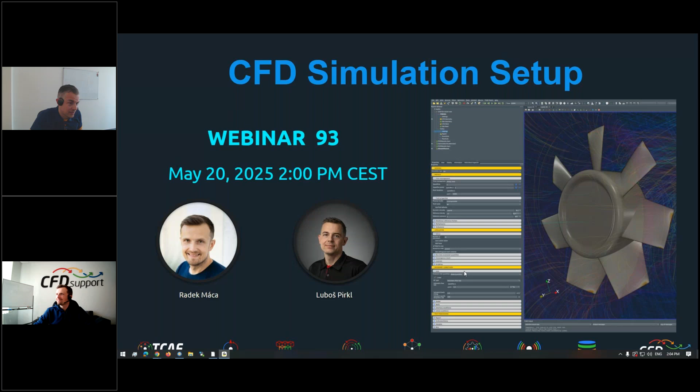In the next 5 minutes, I will mention all the necessary information about what's on the table. If I'll be longer than 5 minutes, I will buy you a beer when we meet personally next time, so I'll be careful to be shorter than 5 minutes.

Then we will start with general thoughts about how the simulations should be done, could be done, and we'll go into more and more particular details in the webinar - what we think about how to set up simulations, what are the smart tips and tricks, and special how-tos.

And then we will go more into goals, principles, and thinking of engineering simulations. And then we have two cases.

In the first case, it will be rather general, a very simple pipe flow. I'll show very quickly some principles about how to set up the case, but very simple. In the larger case, Radek will show a more detailed example of how to set up, specifically how to create the mesh, because it's always very important to create the mesh, and how to set up the critical settings of a Kaplan turbine.

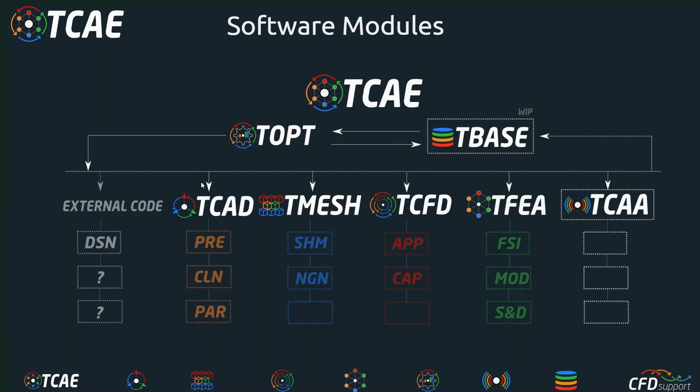TCAE is extremely flexible. It's ready to be used in an existing environment or for new users, so there are many usability options. TCAE is unlimited - there are no limitations on number of users or job cores, so you can be sure users will use their resources to the fullest.

It's based on open source - there are more than 60 open source projects included in TCAE, and we are ready to make available what's on the open source market to professional users in industry. So it's our main business and main added value. On top of the open source packages available in the market, we have invested more than 50 man-years of consistent development to deliver TCAE. So I guess the value of TCAE is obvious.

TCAE is accurate. It can be used as a black box, or it can be used as a highly sophisticated, high-end software where the user takes all the decisions step by step. So it's always up to the user how deep to go into the rabbit hole, or not at all.

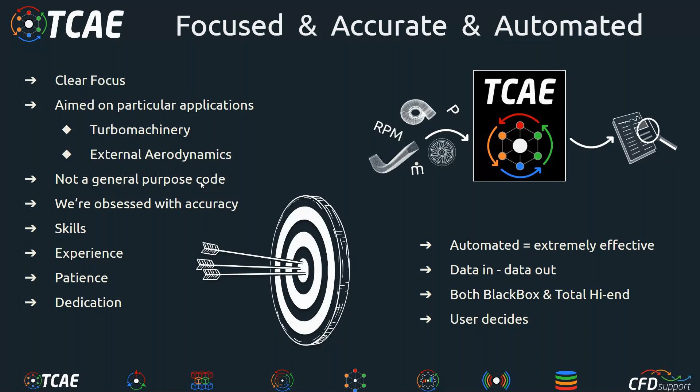There are various options and ways how to use TCAE. It can be used on laptop, personal computer, cluster, cloud, or remotely from home, in Windows, in Linux, in batch mode, or in graphical interface. So there's really a wide range of possible usage.

We have available 15 benchmarks which are publicly available and can be used again and again transparently. There are more than 50 real tutorials based on real projects from our consultancy business, and we have really good technical support. The new release has been released some time ago.

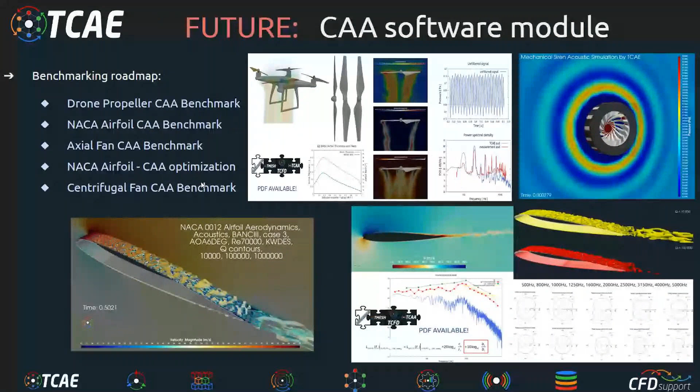The cornerstones of the future development are the optimization tool, the acoustic solver, and the new simulation module we are working very intensively on at the moment, called TBASE, which will help users create their own surrogate models and work with their data.

Yes, and this will be it. I was very much concerned to be in those 5 minutes which I just made. So I will start with the content.

I would like to recommend to every user, with every engineering project, to start with goals. Really, it sounds like a cliche, which everyone says, but everyone knows that, of course. But I really recommend to sit down, grab a coffee, and think about what are your goals.

Goals are extremely important everywhere, in society and in life, and especially in engineering simulations. You have to know your goals because you have to know where you are going. Unless, you will never get there.

So, goals. You should think about what's your project nature, where it comes from, where you want to go with it. If your project is disposable, one-off, or whether you are creating a workflow, a long-term process. That's extremely important. You should know what are your expectations, what you expect, where your project takes you.

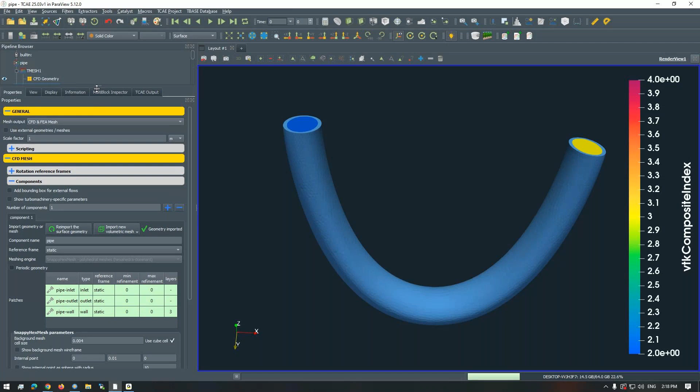I only have a general case, which is a standard, simplest possible tutorial for TCAE - a curved pipe where the flow flows through. This shows that simulation-ready geometry is something like this. I'll hide the FEA and FSI parts since we do not need them here.

In this example, almost every engineering CFD simulation project has some combination of walls - a rigid wall where the fluid flows, similar for external aerodynamics, but here we're talking about internal aerodynamics. There are also interfaces, typically the inlet and the outlet. So you have inlet, outlet, and wall - this is what we call simulation-ready geometry, because it's one component - we call these components.

The volumes, or future volumes, we call components, and you can have many components connected with interfaces. This tutorial is rather simple, so I have only one component - a curved pipe with an inlet and an outlet. Technically it's an STL file, a surface file, exported from some engineering CAD system. This is what we call simulation-ready geometry.

It's important that the geometry is watertight, waterproof. That means there are no big holes, or preferably no holes at all, so the flow can stay in and we can prescribe the correct boundary conditions everywhere. That makes the simulation complete, and we can run it.

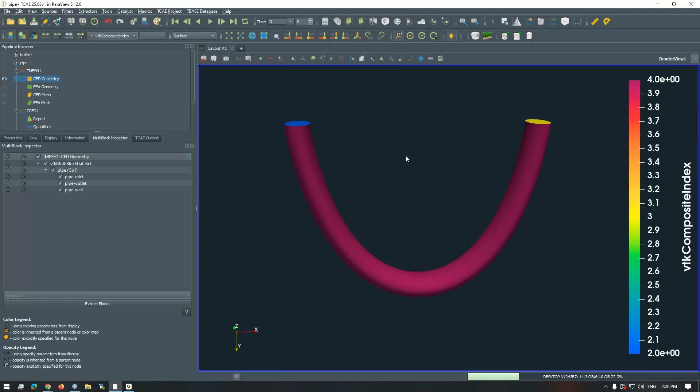So you have to have simulation-ready geometry, which was the topic of the last webinar. Then you need to start with the mesh - you have to have the mesh, and that's a process. You'll split your volume into little pieces called cells, which helps you run the simulation on it.

For such a case, we have a system of components here - in other software it would be similar. I have just one component called pipe, and I say it's static - nothing is rotating, nothing is moving here. It's a really static, solid component, and yes, it has one wall.

According to the STL surfaces, it has the outlet and the inlet. Let me take a look at what I have in the presentation - I have to create a full mesh for all components, yes.

For the mesh, I have to set a very important thing. If we use it - and we recommend it, but we never push it - we recommend the SnappyHexMesh, which is highly compatible with TCAE and OpenFOAM, and it's really useful. But again, we only recommend it, we never push it, so it's always up to the user whether they just load a ready-made, complete mesh and start computing directly on it.

TCAE is ready for that. Or, if you are creating the mesh, we suppose the simple, typical case that you create the mesh from scratch here.

So we have a component consisting of watertight STL surfaces, and these STL surfaces are used to mesh the volume with a background mesh. You specify how many times the background mesh is refined with respect to the surface, and how many boundary layers are considered in the case.

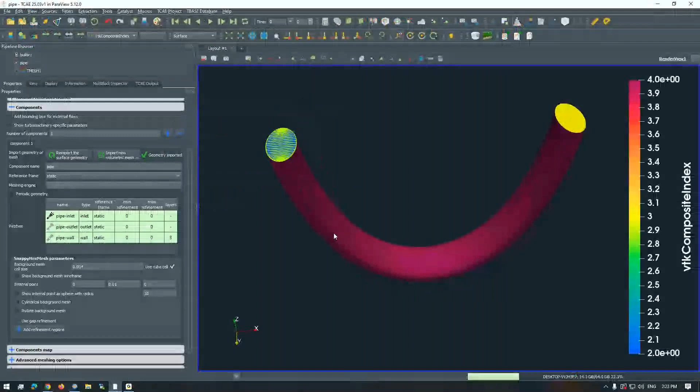You can say it here. This is just a basic principle. You can refine the mesh many times, and sometimes you need to specify a point located inside the component, which tells the mesh solver what's inside and what's outside. That's a general principle, and that's what we did in this pipe case. A couple of comments on that.

The mesh size is a super critical parameter and number. The size of the mesh, the number of cells it consists of, is extremely important. It influences the speed of convergence, the quality of results, and definitely concerns everything, especially the amount of data and the simulation time.

Simulation time is one of the bottlenecks. If you asked me, the biggest bottleneck in engineering simulations is getting simulation-ready geometry. The second biggest bottleneck is simulation time. Simulations take time - big simulations, transient simulations, multi-phase simulations, accurate simulations - they all take quite a lot of time. We have to get used to it, know what we're doing, and save every resource possible.

Let's take a look at what's next. I always recommend starting every project with small meshes. Play it small, do a lot of iterations in the beginning, because you can always refine the mesh later. It's simple to refine anything, but finer meshes take so much more time, effort, and resources. So go in iterations - every engineering project is typically an iterative process, because you always improve things. But start small, start with small meshes - it saves you tons of time and also gray hair.

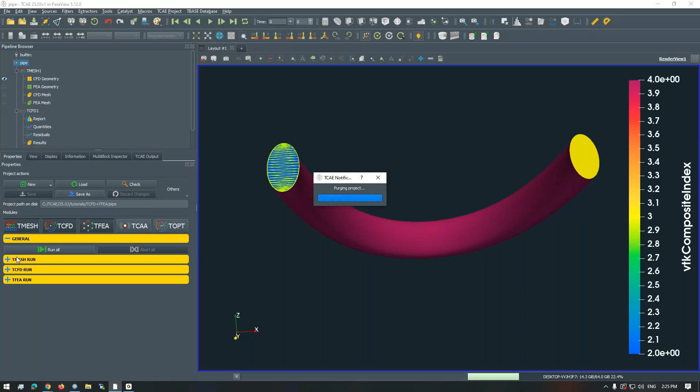Okay, that was just quickly on the mesh. I can say we have some settings here. I can completely remove everything from the case and ask the mesh solver to create the mesh. So it's going on here - it tells me yes, it's meshing now. The meshing process is running. It takes only a little while, so we can wait for it. When the mesh is created, I can visualize it with this button.

Let me check. Okay, I'll ask again - can you show me the mesh, please? And yes, it's here. So this is the mesh of my basic settings. We are already looking at the mesh created in the tmesh module, which ran all the necessary settings, wrote everything down, and ran blockMesh and snappyHexMesh on it.

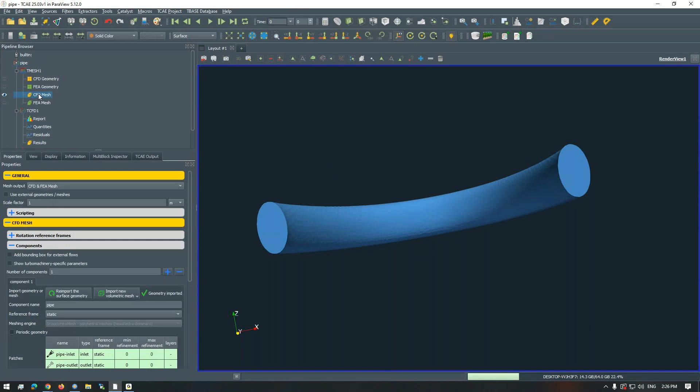I don't know why it's so slow today, but fair enough - so this is my mesh. This is already the volume mesh which will be the object of my simulation. It's quite rough, but I'm okay with it because it's relatively quick. So you have to have the mesh, and in today's webinar Radek will show much more about how to set it up, but I'll just mention a couple of principles here.

The mesh may look complicated, but it's not. Almost everything can be automated, almost everything can be reused - it's like a neural network, right? You can use the best things in the future because you remember them. It's the same with riding a bike - no one is the best when they ride a bike the first time, but next time and next time it gets better and better, and it gets quickly better the more you ride it.

Without knowing, you're actually getting better at it. It's the same with CFD simulations - there's always a huge chance you'll repeat the good, positive outcomes and tips and tricks. So what looks difficult is not, after some practice and experience.

Okay, I'll just quickly comment on simulation setup. I'll just quickly ask my colleague Radek if I'm still visible and you can see and follow.

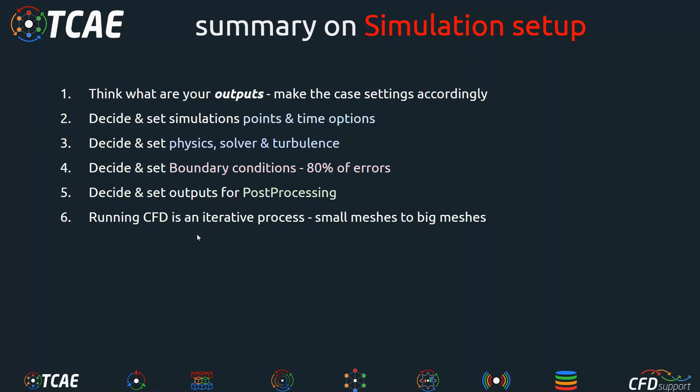So you typically run iterations here - iterations in running: run 1, run 2, run 155. Small meshes help you iterate quickly over your simulations and improve quickly.

You should always, during the simulation, follow the basic laws that conserve. So the flow rates should conserve, the residuals should ideally drop, and final results can be followed too.

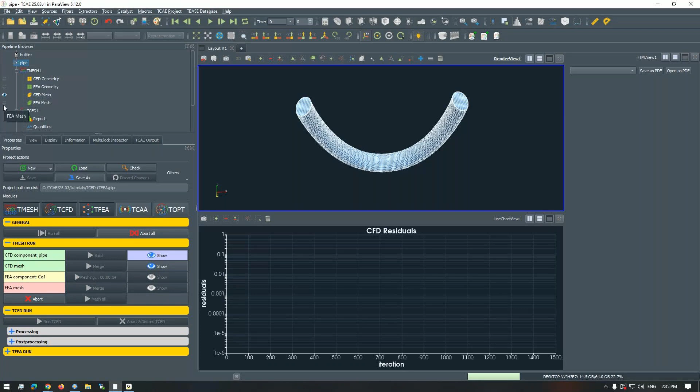We can maybe show it. So if I run the simulation, which is this CFD, I'll run everything because I'm not sure if there are several steps. So I have run all run processes. Now it's running, and I guess this case is a little special because it also has an FEA part. There's the outer part, which is a coating of the pipe, meshed with NetGen, and the forces are transformed to the surface, so we can compute the material stress and deformation. It's a little more complicated, but still I see something going on here.

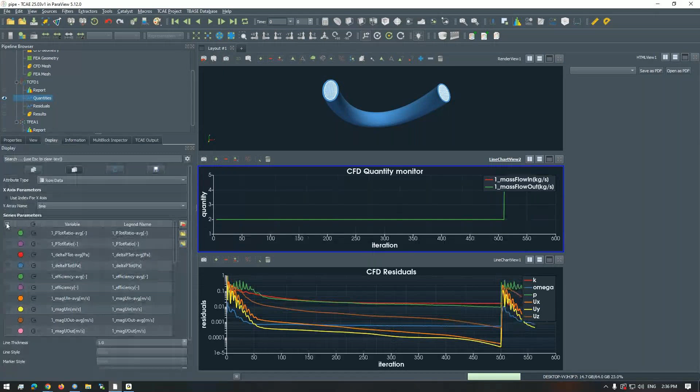Yes, so the case is finally running and iterating. We could show another window view. I could be interested, for example, in a line chart view, in some additional quantities processed during runtime, and we could take a look at, for example, how the pressure drop looks like. Okay, maybe why not? Yes, so this is okay. It's quite flat in this case, but we could zoom in a little bit.

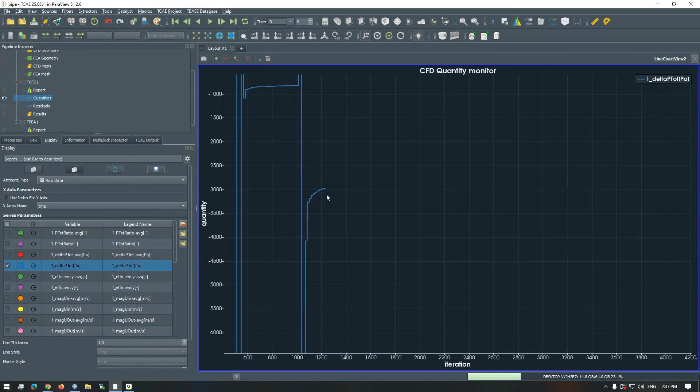And this is how the simulation — actually, the simulation is done already. Okay, so we have three points. No, the third point is going on here, let's catch it. I'm going for it. Yes, here you can see this is the delta P total, the difference in total pressure from the inlet to the outlet, and you see it's hopefully converging. It's a simple tutorial, so you can display things here. You can see three sets of residuals here.

So again, things may look complicated for the first time, but they are not. You should be patient and really learn along the way. And look what we have here.

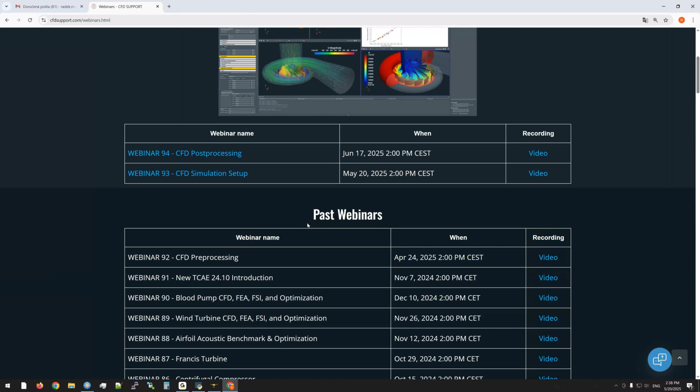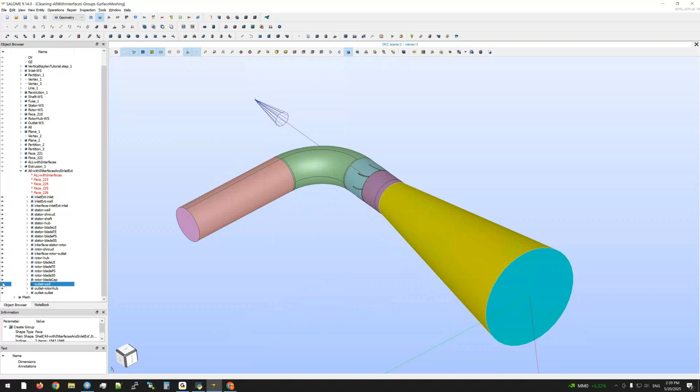So what we did, just a small recap. We took this small Kaplan turbine, the real solid shape of the housing, of the rotor, including all the solids, all the parts which are not necessary for CFD simulation. So what we did last time, we cleaned it. We got rid of all the solids and unnecessary parts, and extracted just the wet surface. Also we created the interfaces between rotor and stator, and between the extensions, for example. Then we exported, generated and triangulated the surfaces, and exported the STLs.

So today I will take these STLs. I have put them here into this directory, and these STLs will be used to import and create the simulation flow domain. Just to see the overview of all of them: basically we have a set of STLs exported, and what we do is use each set of STLs to create a set of components.

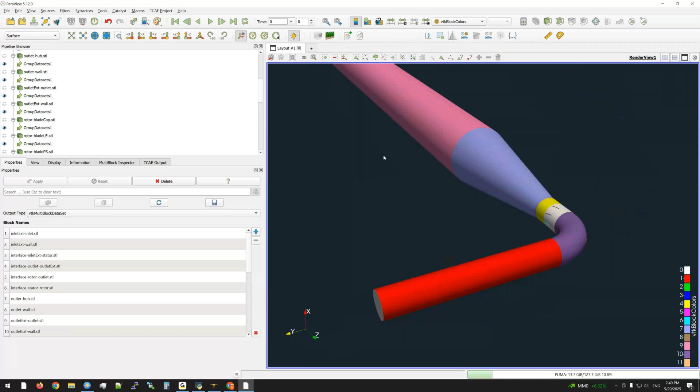So we will have more components to build our flow domain. In this example, I have also generated this huge or large extension, which is somehow useful to let the flow calm down and have proper conditions, for example based on the measurement or the setup. So for example, you just know the pressure at some points, and also with respect to evaluation purposes — you'd like to evaluate the efficiency starting from this elbow and ending on this outlet cone, etc. This will create additional components, and more components, more fun.

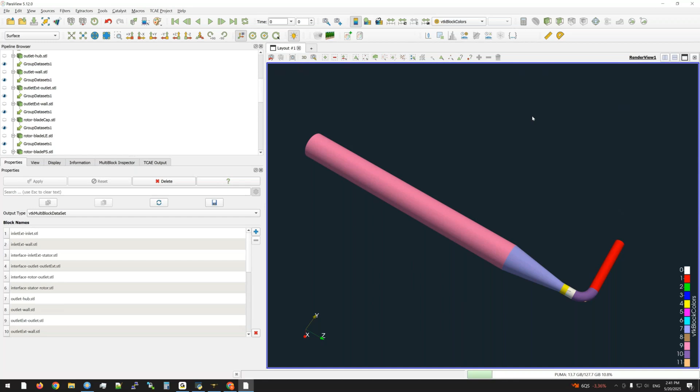So let me start creating the project. I will start from the very beginning, as if you are starting a new project from scratch. I will open TCAE and create a new project, clicking on new, create empty. I'll store the project in the folder we'll be working with today and name it TCAE webinar Kaplan. From now on, all my setups will be stored within this folder on my disk.

First of all, we need to start setting up the mesh. So let us follow Luboš's notes, or the items which he had presented.

Let's talk about the interface. What we have here is the main project manager, which holds all the managing buttons to work with and run the simulation, generate meshes, generate reports, etc. And here we can enable all the modules.

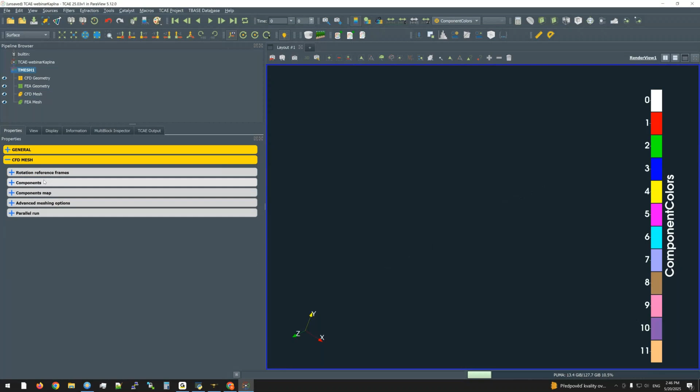Okay, so that's the rotation reference frames, and now we go to components. We will set things up component by component. Basically, each component is meshed separately, so we can treat any component as a separate mesh. We just need to focus on each component, mesh it, check if the mesh is correct, and then go for the next component.

Whenever we have all the components set, then we need to take care about the connections and the interfaces, and if all these are checked and generated, then we are done and can go for the CFD setup. So let's go component by component and start importing the STLs, beginning with the first component, which was the inlet extension.

Inlet extension is just the pipe. So we have inlet extension inlet, we have a wall, and we have one interface which will be connected to the stator. So we have these three parts. Ta-da! We have it here.

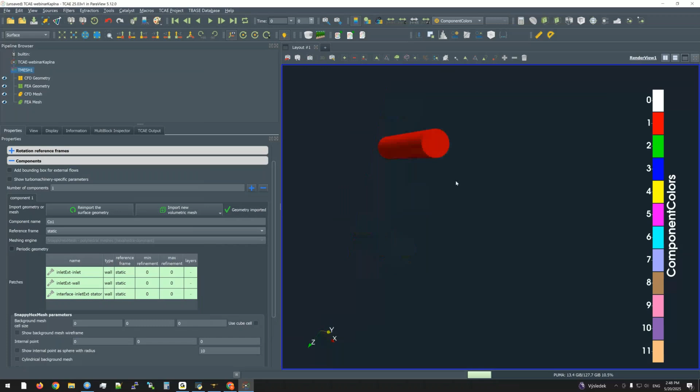Whenever you load these STLs, it will appear in this table, and also it will appear in the render view. Anytime you can click on any part to see which part we are setting up if we are not sure. And what is also good is to click here, because the CFD geometry is held by this item. It can be hidden, it can be shown.

And what I like is to set some kind of opacity, because if there are some objects inside, I would like to see what is happening inside. And also, for example, for setting up internal point, which defines part of the meshing, it's good to have the opacity to see if the point is put inside.

So for each component, what we can set, we can set a component name. It's up to the user. For example, I can name it as inlet extension. Reference frame, static. Periodic geometry is in case we have just a periodic segment.

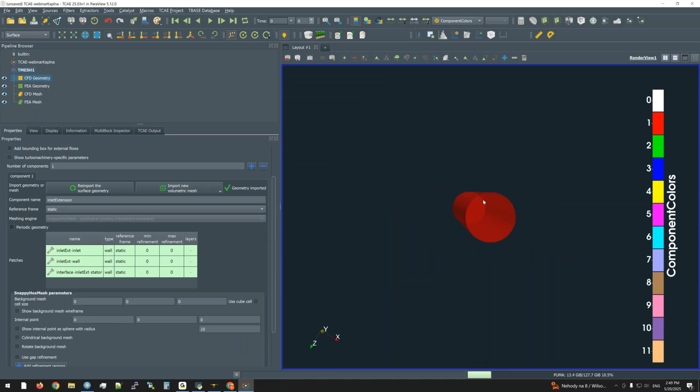So in some scenarios where we expect the symmetrical behavior of the flow, we can save some cells by cutting the axial domain like a cake. So we put just one part and set periodic boundary condition, for example. But in this case, we will have it as a full pipe.

So what we have here is the type of the boundaries. So inlet - we have a set of boundaries. I think for CFD engineering it's pretty clear: at least if you are doing internal flow, you have to have at least one inlet and one outlet from the domain. With respect to the component, it has to have some inlet and outlet.

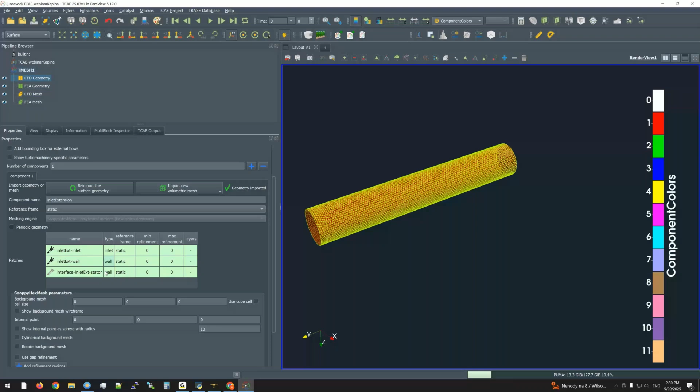So if the patch is connected to the neighboring component, we call it interface. If it's not, we call it inlet or outlet. So inlet extension is the inlet, wall is wall, which is the default type, and the interface from inlet to the stator will be the outlet interface.

The naming I think is natural: inlet denotes the part where the flow goes in, outlet is the part where the flow goes out, and free stream interface is where we don't know the direction of the flow, or there could be in general both directions - something like if you have the propeller behind the ship or vessel, and you need to put the propeller into the rotating cylinder, and the whole cylinder is the interface. So there can be both direction flow on this cylinder. For that scenario, we set the free stream interface.

But here we have the outlet interface, because this is just the extension to initialize the flow. We don't need to solve it too accurately. So for example, we can keep all the refinement surfaces to minimum, and what we need to set is the background mesh cell size - this is the largest cell which will be created.

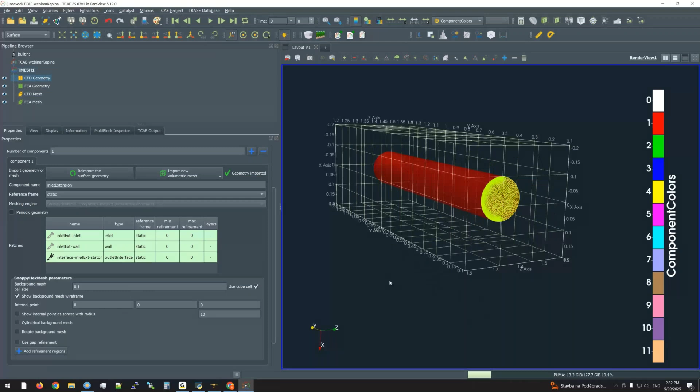I typically use cube cells, but for example, I can show you how to save some cells on these extensions. First of all, I'll do it this way. I think the diameter of the pipe is something like 16 centimeters. So if I set just 10 centimeters, it's too large, as you can see. So let me start with, for example, 1 centimeter. It could be fine.

Following one of the key points: always start with a rough mesh. Make the mesh as rough as possible, but the mesh refinement has to be set in a way that all the topological shapes and all the details are captured. Typically, if you do such a large meshing, I think it's not a good idea, because you will have just one cell or 2-3 cells - it may not even be possible to mesh. But to a certain level, it must be accurate and well resolved.

So let's start with 1 centimeter. For example, if you would like to save some cells on this part because it's not so important, you can uncheck the cube, and now you can set the dimensions of the basic cell size in any direction. Let's start, for example, in - I think this is the y direction, right? So we can make it double in this direction to save some cells.

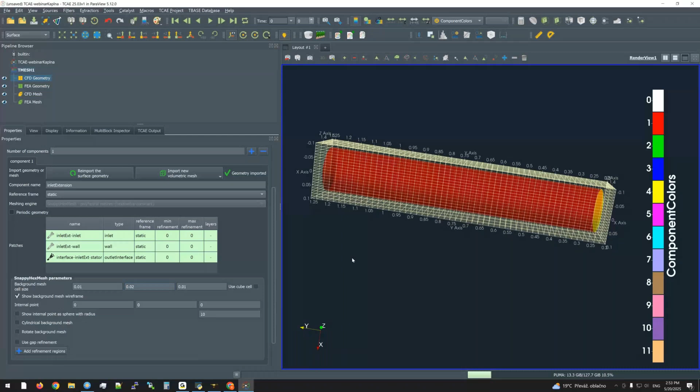Okay, and the last important parameter to set is the internal point. So internal point is visualized by a point.

It's interactive, so you can take it and push it into the internal part of your component, or you can define it manually. Let's say I will adjust this radius just for visualization purposes, so it will visualize this sphere, which is nicely draggable, and we can push it into our domain, or you can put it manually if you know the coordinates or dimensions of your components.

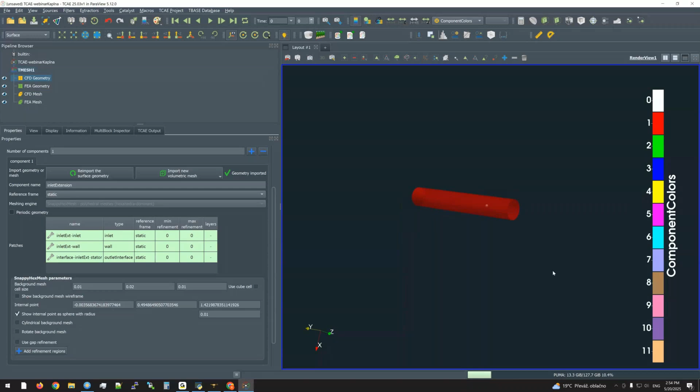Okay, so I will get rid of visualization of this outlet interface. I think I am done here, so I'm okay with that. I can hide the internal point just so I don't accidentally move it outside. Now, for example, if you have the first component set, you can save the current setup.

And just quickly you can build a mesh. Now, if you see it, there is some trouble with my setup, so I can click here, check, and I think it will tell me that I have the outlet interface which is not connected to any other component. So if I need to mesh it from now on, I can set it as outlet, go back, save my current setup, and now I can build the mesh.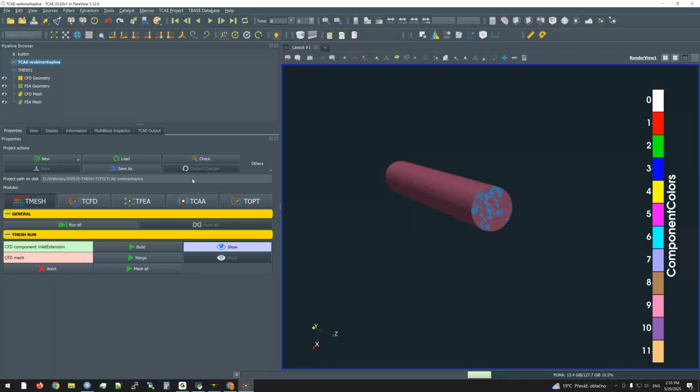If you click here on the tab TCAE output, you will see what is happening. Now, the mesh generation is pretty quick because there is almost nothing to do, just create a background mesh and make the snapping. So if I show the mesh, as Lubos already shown us, surface with edges, we can see the basic mesh refinement. It's pretty rough, but the mesh is okay for the simulation point of view.

From the accuracy point of view, of course, it's not optimal, but for the first check if my simulation will be set up properly, and if I get at least some results, it's enough. Also for the webinar purposes, because I need to run the simulation quickly within the webinar. It would be pretty boring to wait, for example, 1 hour for the results.

Okay, so this was the first component, and in a similar way we are going to the next component, which will be more interesting. So let's visualize back the CFD input geometry. I will get rid of the mesh, and let's import the parts for the stator. So let's take all the stator parts and the interfaces.

So the interface from the inlet extension is this one, and the next neighboring component is the rotor. So let's pick this interface, stator-rotor STL. All right, perfect. So a new set of STLs for the second component is loaded, and now we can do the same framework.

So set all the parameters, I can name it stator. Reference frame is still static. I don't need any periodic geometry because it's a full geometry. And let's go for the types.

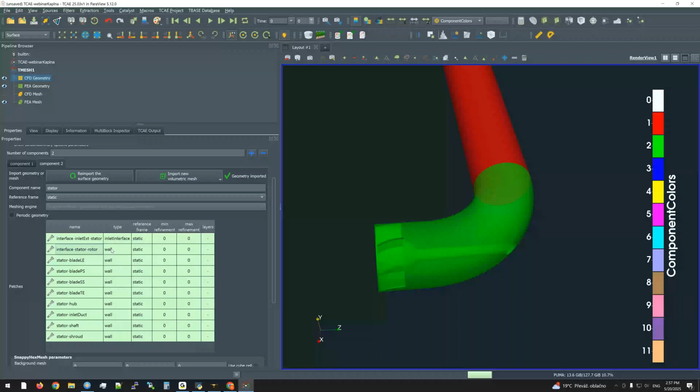So to be able to mesh it, before I add additional components, I will set it as outlet. The other, I can keep it as a wall, for sake of simplicity I will keep it as a wall. Stator hub, everything is wall, and so the rest are the walls, rigid walls.

Reference frame here, let's check. So this shaft which goes through the stator, the stator is, I think, adjusted to the casing by the blades, and the shaft goes through the inner part of the stator to the rotor. So this shaft part, which is physically rotating, I can prescribe the rotating part outside the rotating component. This can be done for all rotational symmetry parts, walls, or patches.

So in this way we have just this shaft, so we can prescribe rotation on this shaft within the stationary component. Now let's go for the refinement. First, before I go for the refinement levels, let's set the background mesh cell size. Again, I will put 1 centimeter, which was fine for the previous component. Now I keep it as a cube shape.

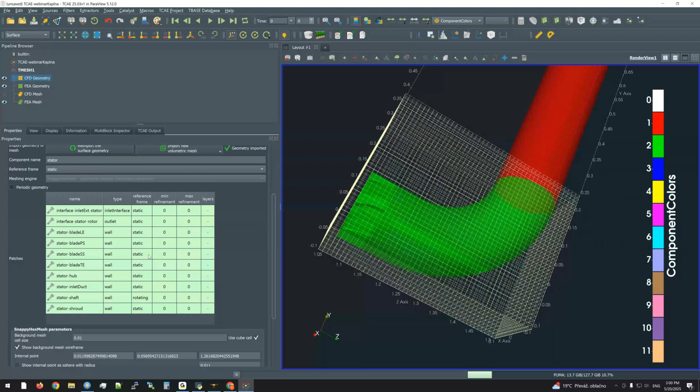Perfect, now let's set up the refinement. The refinement means, if I visualize the background mesh cell size, every cell intersected by one of these STLs will be refined up to the level we preset here. So let's go for it.

Okay, then what we can refine, for example, all the other parts. So let's set everything to level 2. And maybe this inlet duct we can also keep, for example, set to level 1.

Then what we have there, blade pressure suction side, let's see what will happen if we keep it at level 2. And for example, blade leading edge, which are these small parts of the blade that are highly curved, for those parts we can set a higher level of refinement. Because they are small, we can keep the level the same for minimum and maximum.

The minimum and maximum refinement level, if we set different values, for example 3 and 5, the algorithm decides what level to put at different parts of these STLs based on the local curvature. But in this case, because this part is curved as a whole, we can set the same level of refinement for the whole part.

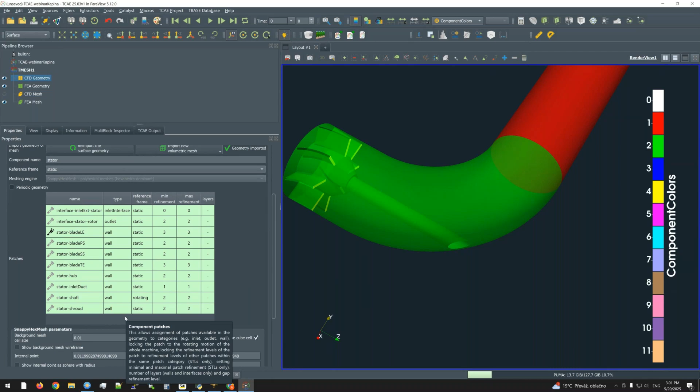All right, I think we can keep it this way, and let's try what will happen if we start meshing it and how the mesh will look like. So again, I can go back to the manager, click save to be sure everything is correctly set, and we can click check.

So project setup content again, interface. Yeah, perfect, so I have created the interfaces but haven't connected them yet. The connection is done by right button click on the given interface patch, and the menu will appear giving you a set of possible connections. We have only one possible connection now, to connect to the stator interface.

So now it is connected, and the connection can also be checked here. If you go a little bit further in this menu and scroll down, and extend this components map, it will tell you how each component is connected to the others. So now we have a nice solid connection from the inlet extension to the stator.

All right, so now again save my setup to be sure. I will check project setup is okay, and because I've changed the type of the boundary to the interface, the first component has to be remeshed too. But we are fine because we haven't changed any meshing parameters.

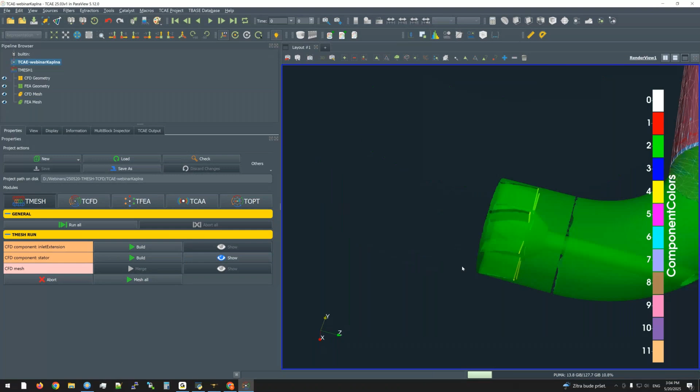Okay, and something was wrong. As you can see, the mesh leaked out, so probably I forgot to include some part of the setup. So what did I do? Okay, I have all the parts, I hope: this is the shroud, this is the shaft, inlet duct is okay, stator hub is also there, stator blade, blade suction, pressure side, leading edge, interface rotor stator. All right, so now I'm not sure what happened.

So the internal point is still inside, which is okay. The refinement was also fine. So, okay, to be honest, I'm not sure what happened.

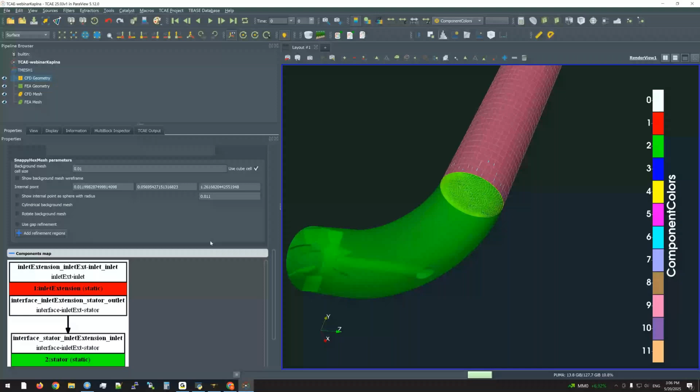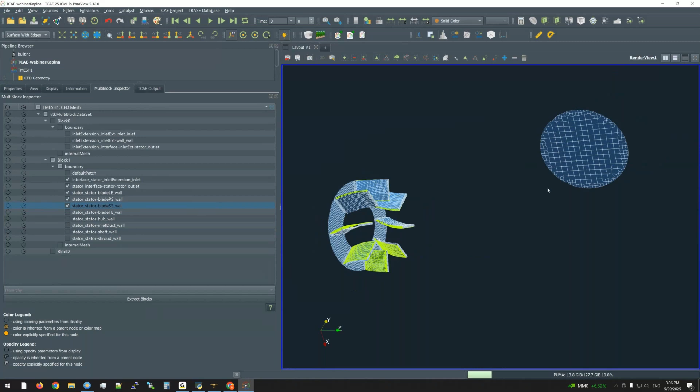So typically, what does it mean if you see such a leakage? If you visualize the mesh again, it means the mesh was meshed from both sides. So if I go to the multi-block and pick the boundary, you can visualize each part of the mesh. We have it there, but also this default patch, which indicates that the mesh leaked out from our domain. That means the domain is not closed fully.

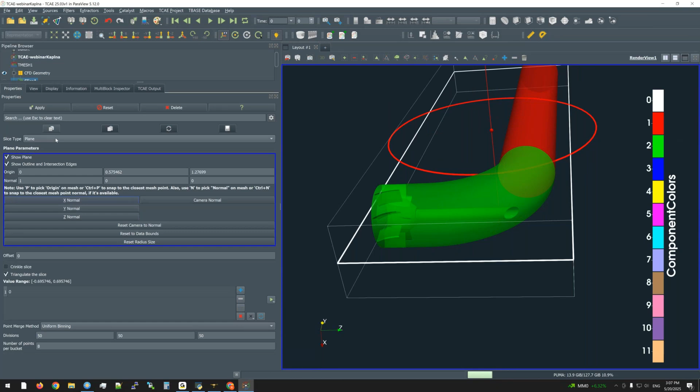What I can do is visualize my input geometry and, for example, do a slice if I have an enclosed contour. So let me make an X slice - apply, get rid of the CFD. Okay, so I think everything is closed, right? If I get rid of the first one... okay, it seems fine.

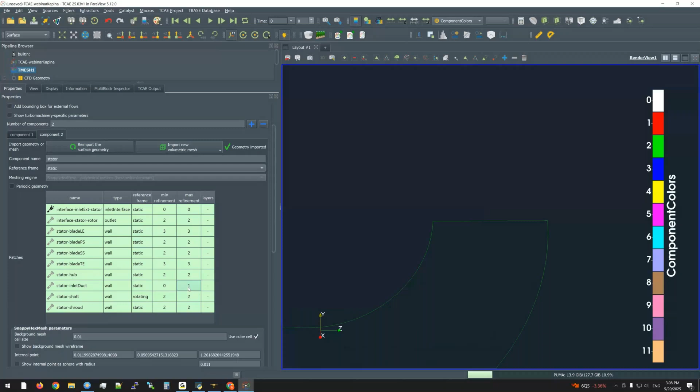Maybe I don't know if the export was okay - interface rotor to stator inlet duct, or maybe the mesh. Let me make it a little rough, because I'm not sure if I took a proper STL. If you can see, I have some troubles here - we have some local holes in there. So maybe I took a wrong STL, but let's try to fix it by making the mesh rougher.

Just as an example, let's regenerate the mesh with a slightly rough setup. The main point is that I should go back to the STL generation and check what happened here - why these holes appear at this surface part. Let's check if the mesh will be better now, and if not, maybe there's another option to heal it implicitly, but let's wait for the result.

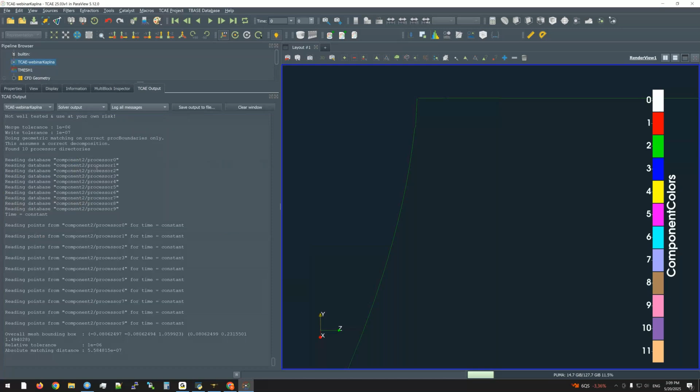Okay, and now it's meshed properly. So there was some trouble. Let's go back to the multi-block inspector - no sorry, CFD mesh - and visualize the whole mesh. Okay, so now it is correct. So I had some troubles on the input STL.

So definitely when I go for refinement, I should recheck the input STL and heal the errors in it. This was an example of how to tackle errors in the input geometry, which again emphasizes what Luboš mentioned - that the crucial part is to have simulation-ready STLs as the inputs. This was a nice, unexpected example of bad STL meshing quality.

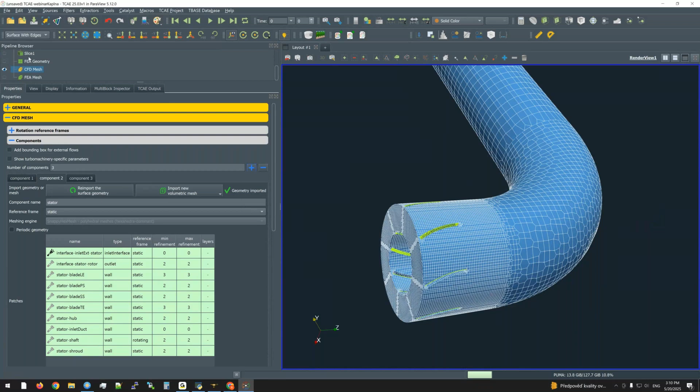And I will quickly go for the other components in this example. Let's go for the rotor - again I will import the rotor STLs, the interface of the rotors and STLs of the rotor. Let's import them. For now I will get rid of the CFD mesh and show the CFD geometry. So now we have this part.

What I can do is set the component name as rotor. Let's go for the interfaces - this is the rotor outlet, so I will set it for now as the outlet. Here I will set it as inlet interface for the stator, because I can directly connect it to the interface from the rotor side. Right click, connection to the stator - and now we have three nicely connected components.

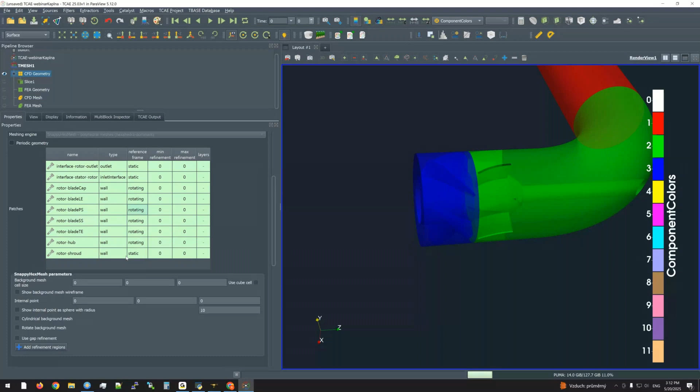I will keep all as walls, and for the reference frame I need to care mainly about the wall boundaries. All the walls here, like the hub excluding the shroud, will be rotating - all the parts which create the impeller should be rotating, but the shroud is static. So it's a so-called unshrouded case - the shroud is not rotating, only the impeller and blades of the rotor are rotating.

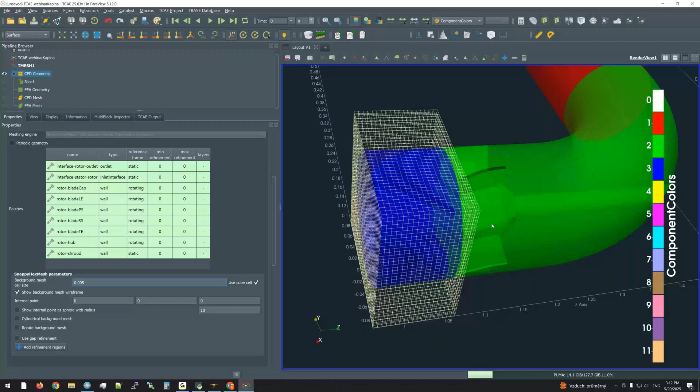Before I go for the refinement levels, I will again set up the cell size for the background mesh. For example, because the rotor part is the most important part and the main flow patterns happen there, I can set a finer refinement or finer cells at this level to have finer cells in the volume, not only on the surfaces. In the same way, I need to set the internal point.

Let's put it inside. If you're placing it manually, you need to change the views to adjust the point inside the rotor part. Just check that the point isn't, for example, in the hub or in the blade. But I think now it's pretty much okay, here between in the flow, in the blade passage. Okay, so it's placed properly.

Go back for the refinement level. What I like is that the mesh refinement on neighboring interfaces is homogeneous, or has the same sizing of the cells. It makes sense because the quantities are interpolated internally on these pairs of interfaces, so it makes sense to have the same refinement from both sides.

So on this rotor-stator interface, for the stator part we have level 2 and 2. And because we have refined the overall cell size twice here, we set half of a cell size on the stator side. So I can just set level 1, because it will be comparable - it will have a comparable size from the rotor side on the interface to the cells on the interface from the stator side.

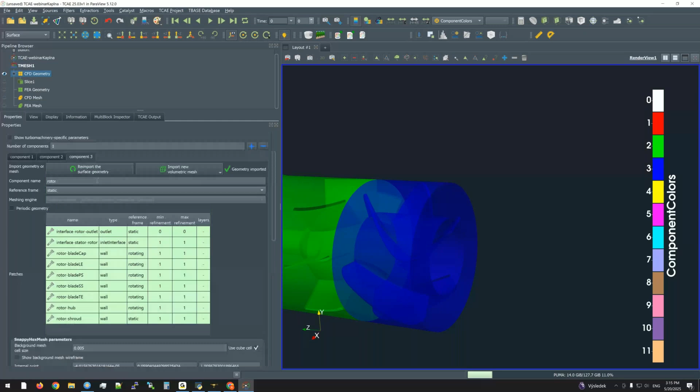Just as an example, to see if this refinement will be sufficient to mesh the rotor section. I hope I set everything - no, I haven't. I forgot to set the reference frame for the whole component, which is important for the rotating part. So I'm setting it as rotating. Now let's click save.

Let's try to run the rotor side meshing, and whenever it's done, let's visualize it. I think we'll see that the mesh will not follow all the detailed parts. This is crucial when you're starting - whenever you generate the mesh, immediately visualize it, because it will tell you a lot about the meshing.

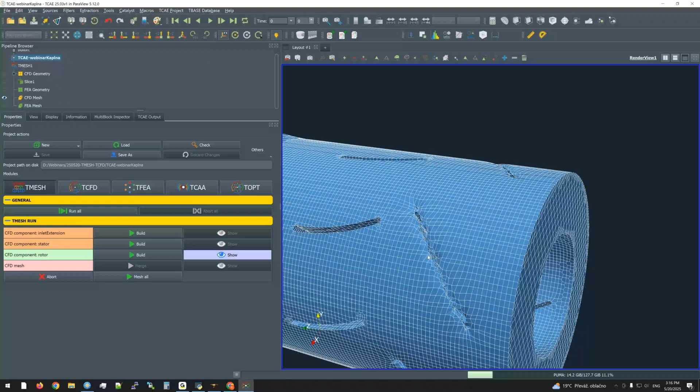As you can see, there is bad refinement level for meshing this gap between the rotor and the stator and the shroud. For example, to see the overall meshing for the blades, you can click on the CFD mesh. I'll get rid of all parts and show just the parts of the rotor - for example, blades and the hub.

You can see both that the leading and trailing edges are not well resolved, and the main problem is that the gap between the blade and the shroud is also not well resolved. You can see such flaws in the mesh, which generate very bad cell parameters that can, during the simulation, lead to divergence or crash of the solver.

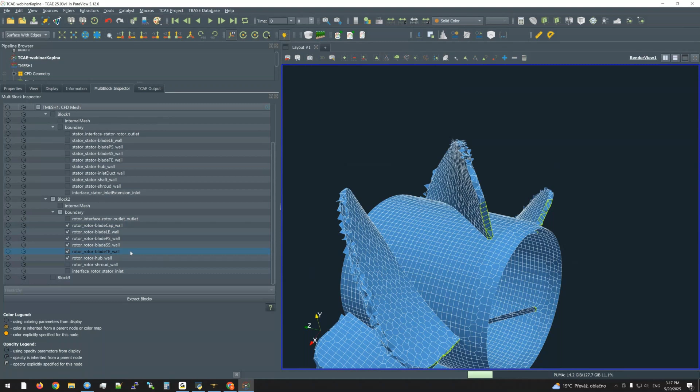So we need to go back and refine the given part. Let's say I will just refine the leading and trailing edge - I will increase the level of refinement on the blade leading edge and the blade trailing edge.

Therefore, if it's possible during the STL generation, it's good to split these parts into separate parts. If possible, it's not crucial, but it will help you and give you more freedom in setting the refinement locally. Otherwise, if you have one STL for the whole blade, you need to set the levels like 1 as a minimum and 2 or 3 as a maximum, and then the meshing engine will decide where to put the lowest or highest level of refinement. All right, and the last one is the blade cap.

We have also splitting of the blade cap, so now we can set level 2 for meshing the blade cap. Going back, clicking on save, and regenerating the rotor mesh.

All right, so this is the standard scenario of mesh generation for new geometry for your new project. Go step by step - let's start with rough parameters, low level refinement, high sizing of the cells, because you'll get the mesh quickly. You'll be confident, and you'll learn the shape of your input geometry. It will show you where the problem could be during the meshing.

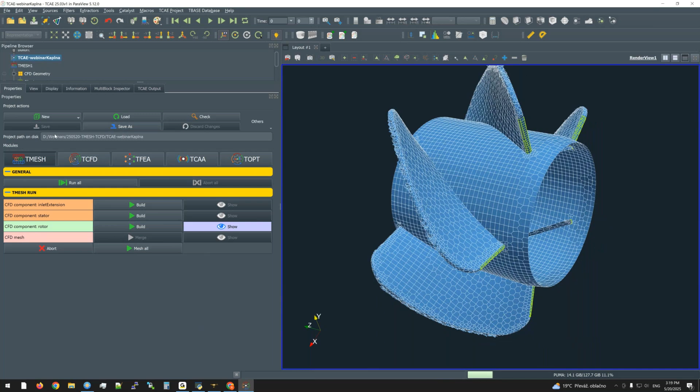So if I click on the CFD mesh, I will also visualize the shroud. Still we can see that there are big flaws and bad cell regions in the gap between the blade and shroud. So for now I will just increase the level of refinement for the blade cap, and I hope finally we'll have a good mesh which we can use for the simulation.

So let's run our last iteration, and if the mesh is okay, then we can add the last component and we are ready to go for the CFD part.

As you can see, you need to iterate, you need to go step by step. What is good is that this component thinking will give you a focus on a certain part, and you don't need to take care about everything within one shot, but you can go step by step over each component.

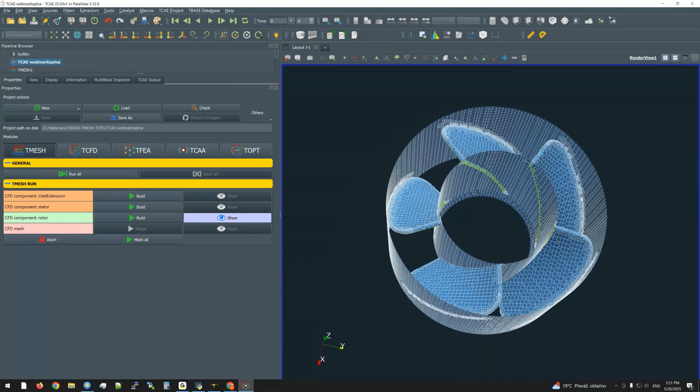As you can see, if you click on this icon, it will reset the view and also reset the view rotation point. So sometimes it's good to re-click this reset view button.

Now you can see there are no holes in the shroud. The better visualization is if you get rid of the surface with edges and visualize just the surface, and now you can see a nice smooth shroud without any problem. I think the rotor part is fine.

Last but not least, maybe just to speed up, I will add the outflow, and I will not be adding the outlet extension. So let's go back to the T-mesh.

Let's go here, and I will add the last component, which will be the outflow. Import, and let's go for the outlet. So outlet hub, outlet wall, and interfaces: interface rotor to outlet, and the last one will be the interface outlet to outlet extension, but I will set it as a final outlet.

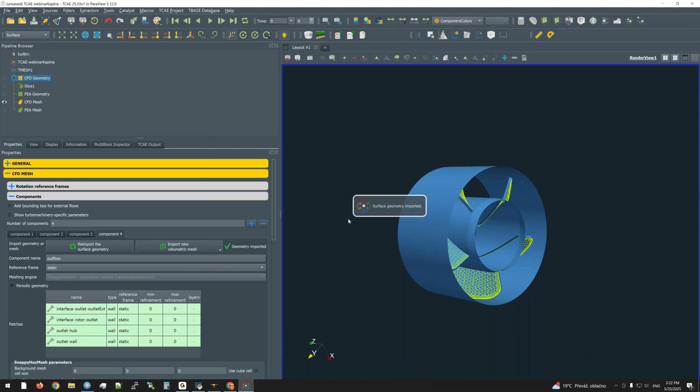This will be pretty quick. You can see the extension just includes the interface, the hub part of the rotor, and the outlet wall. So this part is static. Interface outlet to outlet extension will be the physical outlet.

I will go back to component 4. The outlet I will redefine to outlet interface. Rotor outlet is the inlet interface. Immediately I will connect it to the rotor, and hub and wall are the walls, but the hub is connected to the rotating impeller, so I will set it as rotating.

The background cell size I will set back to, for example, 1 centimeter, and I will refine just the hub. I will refine the inlet interface to the same level as on the rotor side, including also the different sizing, of course. For the outlet wall, I can keep it.

I will set 0 just for speeding up the simulation. I think it will be okay, and the outlet will also not be refined, so it will have the dimensions of the background mesh cell size.

The last thing I need to put is the internal point. It is directly at the outlet, so I need to move it a little bit inside. Nice, and I hope everything is set, so let me check.

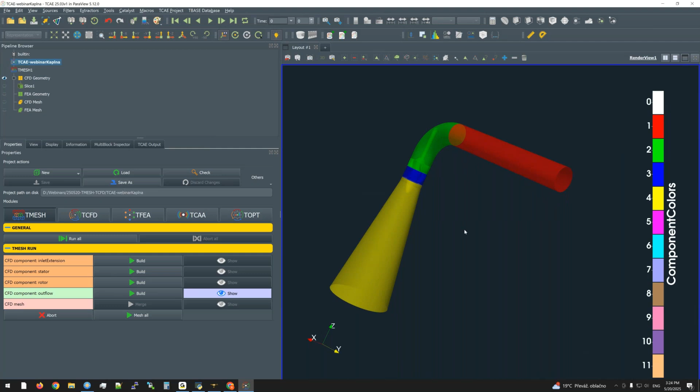And okay, the CFD mesh is... yeah, it was here. Sorry, what have I clicked. Okay, maybe I need to go to the multi-block. Sorry, because I have been clicking a lot here.

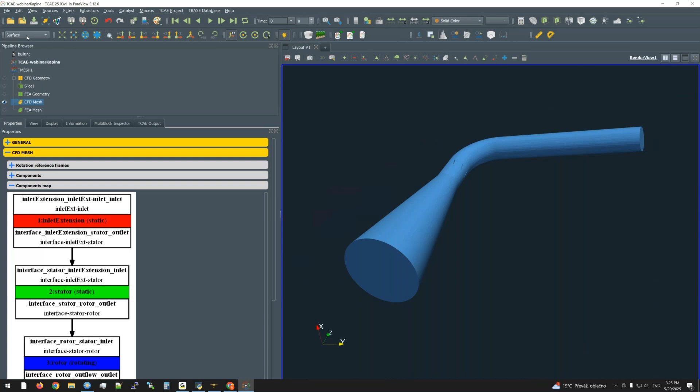Yes, of course, and I will click on everything just to see all the parts, all the visualized parts. Okay, now I visualized already all the parts generated, and when I visualize it as a surface with edges, nice, so we can see it looks good.

There are no flaws in the mesh. Just to be sure, I can make a slice to see what is happening inside, just to see also the volume inside on the slice. Again, surface with edges.

So here we have our topology. What is important is that all the important parts are meshed properly, so each has its own shape, and we don't see any troubles, any holes in the geometry. Here we can see that also the gap is refined, so we have some volume there.

So this is a good setup for the first CFD simulation run, and whenever everything is running, then we can start refining the mesh and looking at how the results change, to obtain results with better accuracy from the mesh parameters point of view.

All right, so everything we have done - meanwhile I will remesh everything to have the final mesh, which is then imported in the background into the CFD section and used for the CFD simulation.

So this was the meshing, and now I can enable the CFD setup and quickly go through it. The CFD setup is much simpler to set up from the time frame point of view, because we just set the parameters of the fluid and the boundary conditions, so we don't need to iterate and wait for the mesh generation. So let's go for the CFD setup.

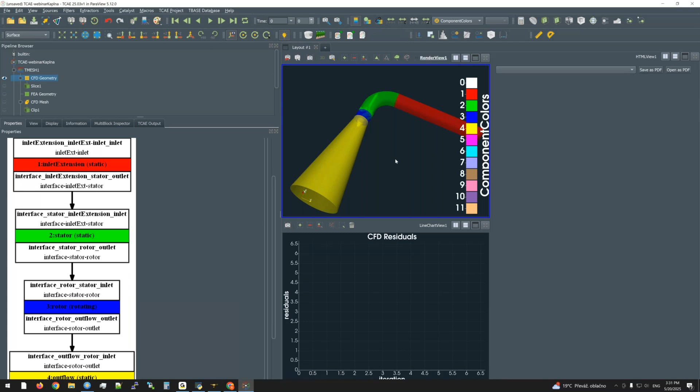A typical mistake is the direction of rotation - it follows the right-hand rule. So if my thumb points along the z-axis, my curled fingers define the rotation direction. As you can see also from the blade definition on the rotor, this is how the impeller rotates, so therefore it's a positive value for the rotation. The positive value is okay.

Within the multiphysics, you can define some additional physics to be included into the simulation. So here, typically for pump and hydro turbine applications, we can ask for evaluation of the cavitation risk.

It's just a post-processing tool which evaluates the pressure and compares it to the saturated vapor pressure value. If the pressure is below this threshold, the saturated vapor pressure, then it denotes these cells and creates statistics on these measurements, and what parameters should be set.

Cavitating patches means these patches will be used to evaluate what proportion of the surface on these patches is affected by cavitation. Typically I would like to include all of them, maybe excluding just the shaft, so I need all of them included in the statistics.

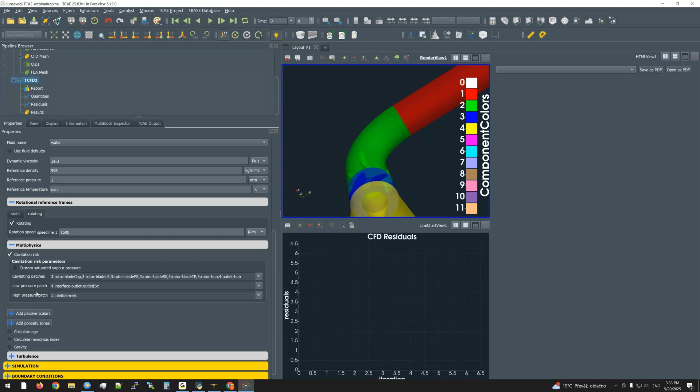The low pressure patch means the pressure at the lowest side, which is used for setting up other additional cavitation parameters. Typically for hydro turbines it's the outlet, so I will set the outlet.

This interface is the high pressure patch, typically the inlet patch or the patch of interest. For example, I can set this elbow, the inflow into this elbow part, so it will be the second one. From this point of view, cavitation is enough to be set here.

Turbulence - you can choose any model you prefer and are confident with for the given application. For the simulation, the number of processors is the same as for the T-mesh part.

Here you can adjust the numerics. Numerical order: second is more accurate but less stable, first is more stable but less accurate. But typically for this pump and hydro turbine application, the second order is stable enough and will give us very accurate results.

If you have some special format or special shape of cells, like from external tools which have high non-orthogonal property of the shapes, you can enable these non-orthogonal mesh schemes, which are more diffusive and keep the solver stable during the simulation. But it's applicable for this kind of non-orthogonal meshes.

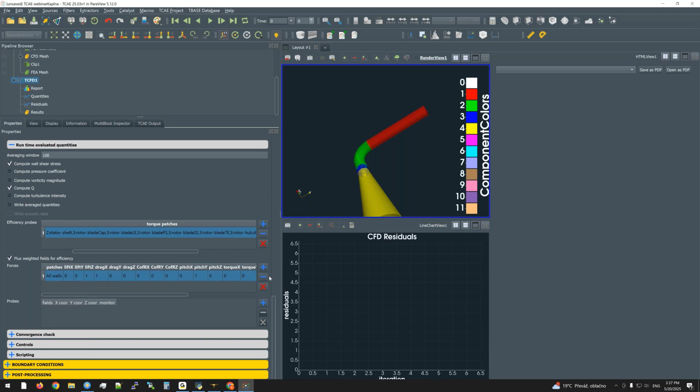You just define the coordinates of the point in which you would like to follow the given quantities. It's simple as that. All right, I'll click somewhere else.

Now we can go for the convergence check. This is the checking criteria for stopping the simulation before the maximum iterations are reached. So for speeding up the simulation, you can tell, okay, my main quantity is the efficiency.

I can choose, for example, efficiency average, and if the efficiency average value doesn't change more than this tolerance over the averaging window, then the simulation can stop before the maximum iterations are reached or the predefined number of iterations are reached.

You can choose absolute - for example, if my tolerance value is 0.1%, then I can keep it in this way, so this is in absolute terms. Or it can be relative to the current value during the simulation.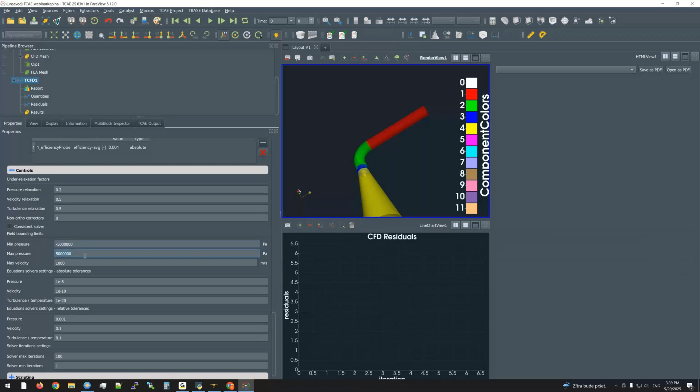In the controls, there are parameters connected to the numerical solver and to the numerics in general. These are parameters connected to the relaxations, some bounding limits which can stabilize the solution in the early stage of the simulation. So just check if the range is wide enough to include all relevant physics.

And then there are some tolerances of equation solvers and other parameters connected to the solver iteration, but this is the numerical solver, this iterative solver for solving the system of linear equations.

Again, scripting can be included in the same way as in the TMESH. So if you would like to evaluate some specific quantities or anything special, it can be scripted via the Python interface. And now the main part, so setting up the boundary conditions.

So here, now the question is, what is the goal of the simulation? What are the known parameters? And based on this, you can choose a proper combination of boundary conditions. A typical combination is flow rate and pressure, and the second one could be pressure and pressure-like boundary conditions.

So here, this is kind of a little bit artificial, small shaped Kaplan turbine. And the only information I found is that it can operate at something like 10 meters head approximately. So I can choose the total pressure, static pressure boundary condition, because I don't know the flow rate at which it operates, but I know the head. So I can set the total pressure at the inlet and static pressure at the outlet, so fixed pressure at the outlet.

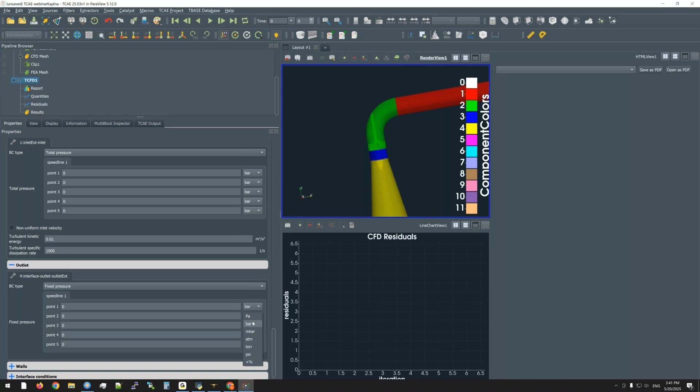And for example, I can set it by bar units. So I will set bars, and I know the pressure at the outlet, so it can be set like atmospheric pressure at the outlet, as it goes out from the piping, for example.

So I set 1 bar, and at the inlet I can vary the pressures to achieve something around 10 meters head. So for example, the middle point could be something like 2 bars to achieve 10 meters head. And just to reveal what is happening around this point, I'll set a higher head for the first point. So typically it's best to start from the higher flow rate, so higher pressure difference, and go to the lower pressure difference. And for example, 0.7 bar as the lowest.

So if I set a pretty low head, I guess it will not work. So let's try this minimum pressure difference for the simulation.

What we also need is to figure out how to initialize the turbulent quantities. So one of the options is to go for turbulent intensity and hydraulic diameter, because we are in a pipe. So I think this is option number 1. Turbulence intensity, typically we set 5% for internal flows. Hydraulic diameter is the diameter of the piping, which is 16 centimeters here.

And reference velocity depends on the flow rate, but I know it because I ran it before, and it's something like 100 up to 200 liters. So if you have this hydraulic diameter, radius is 0.08, squared is 0.0064, and pi is something like 3 for engineers, right? So we have something like 0.02, and if I divide it by the flow rate, we'll get something like 10 meters per second, the average speed at the inlet.

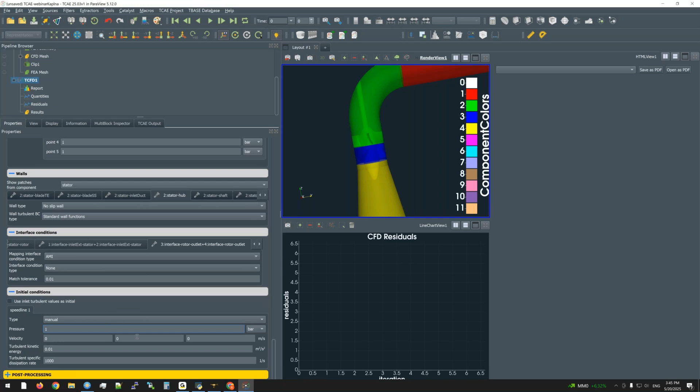Velocity at the inlet, I'm not sure. So for example, I can set this -5 meters per second or -10, which corresponds to my expected flow rate, but it's not so important. It might be some meaningful values, and the turbulent quantities I can initialize by the inlet values.

So this is, from the simulation point of view, all the parameters we need to set, and the final part is what we would like to see in the report at the end. We can also set some specific turbomachinery visualization, which are automatically evaluated and put into the report. So here is blade to blade view and meridional average.

The setup is pretty simple. You will just set on which part of the domain you would like to see it, what is the hub, what is the shroud, which are important to be set to generate blade to blade views, and in general to create the transformation to the blade to blade view. The meridional average is pretty similar.

Here in the report, you can choose the section which you would like to see: efficiency, torque, head, power, cavitation risk, if defined. So I will keep it as a default, so all are there, and the unit into the report.

For example, volumetric flow rate, I think it's more human readable if it will be in liters for this setup. So you can choose your favorite units to see, and these are some additional operations you can do for some extra specific evaluation and exports, typically to some additional post-processing in different tools, or to be connected to additional tools like external FEA solvers or any other solvers.

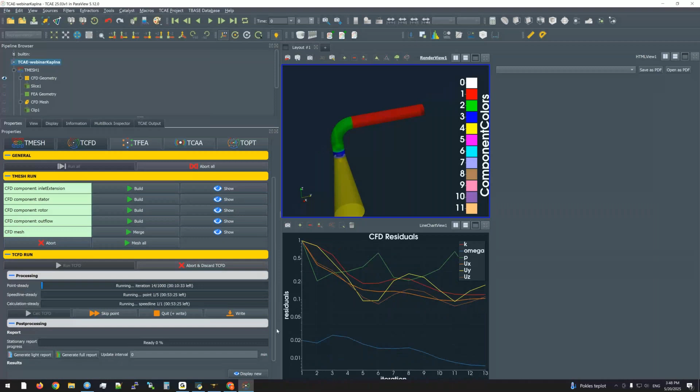So I can hit the run all button, so it will do all the steps which are not yet done. Because the mesh is already generated, it will directly jump to the solver, and now it starts solving our simulation with our boundary conditions and our CFD setup. Just to quickly mention what we can follow.

As Luboš mentioned, we can follow the residuals. We can follow any other quantity which is available. So we can open a new, for example, line chart view. You can go here to the CFD section, enable the quantities section here, and now if you go to the display, you can choose your quantity to follow.

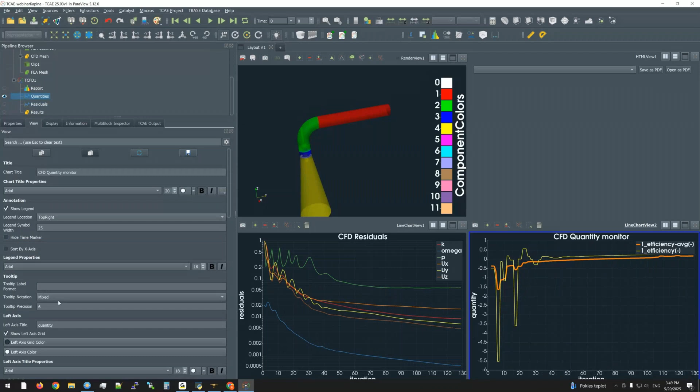So I will go, for example, for efficiency. Then if you click to this view, you can again reset the view on the efficiency. And because sometimes at the beginning of the solver the values are a little bit wild, you would like to focus on the more relevant range. So you can do it by mouse clicking and dragging the mouse, or you can zoom automatically to all the values and manually adjust the left axis range. For example, we can focus on values between 0% and 80%, and this is what you can see.

So the way of following the convergence is looking at the residuals and mainly looking at the goal quantities like efficiency or head or flow rate for this type of simulations. And if the values are calm, not oscillating, and going to the constant value, then this is exactly what we need, what we would like to see for any CFD simulation, that our goal quantities converge quickly and nicely without any oscillations.

All right, so this was a quick CFD workflow overview. As you can see, the first step is to generate a mesh. We always suggest to have a rough mesh, set up a CFD simulation, and then run the simulation, because this will tell you pretty quickly. You don't need to wait for the results several hours, you will get the results pretty quickly.

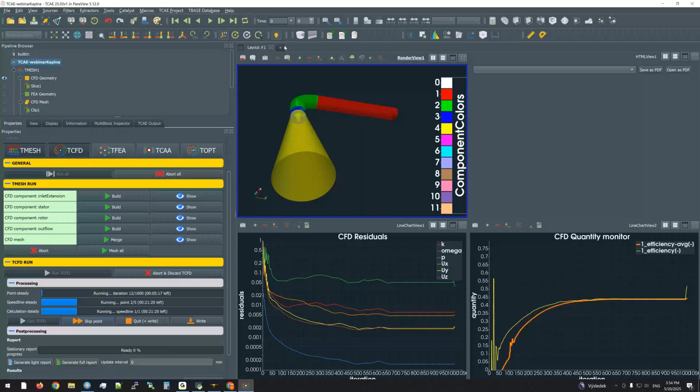If I would like to see, for example, the instant values, which we'll show next time, you can click to write the results at this point, and then I can display them. And if I want to interrupt or stop the simulation but continue later, I can click quit and write. So it will store my intermediate results, and later I can continue with the simulation.

This is the quit and write. And if something is wrong and I need to restart or redesign or modify some parameters, I can abort and discard the setup because I don't need to store them. I will redefine some parameters and run the whole simulation again with the new CFD parameter setup, for example.

And last but not least, during the simulation you can generate the light report, which will tell you basic information about the simulation during the simulation. So you can open the new HTML view, wait for the report, and then the report will appear even during the simulation with the currently simulated data.

And the last one, at the end of the simulation, you will see the full report, something like this HTML view, an HTML report with all the relevant and important parameters in the format of tables and graphs. So you will see the efficiency performance map, the instant values, how it converged, the final values, and it holds for any other quantity which is evaluated.

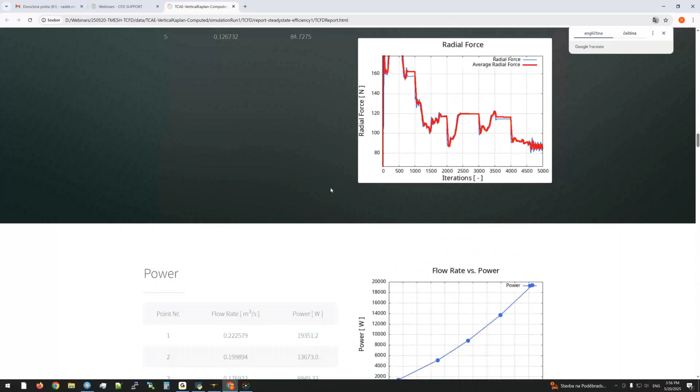Including, for example, cavitation risks, how many cavitating volumes or cells were cavitating, cavitation index, and other quantities. But I think this will be a topic of the next webinar.

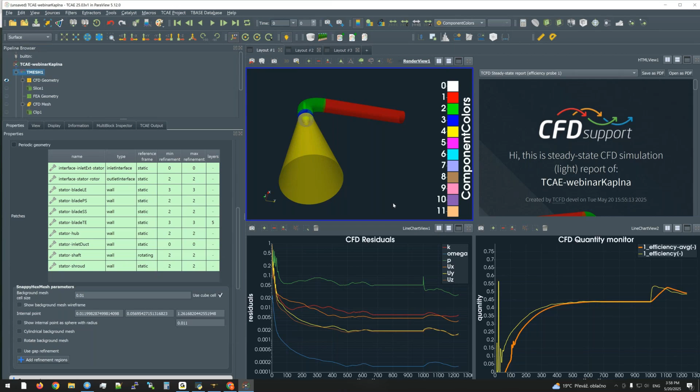So there was another related question: someone is asking whether you can change the configuration, because not everything from OpenFOAM and from snappyHexMesh is included in the graphical interface of the TCAE. The obvious question is if you can change anything on the disk or in the case manually, and if it's taken into account later in the simulation.

Okay, so all the changes have to be done via the interface or via scripting, because the program behind the processor is managing the whole process. But for example, what you can do is generate the whole project even with the results, and then go on the disk into the project folder, for example here into the simulation run, into the CFD, or if you would like to play with the mesh, into the mesh folder, but typically into CFD, into the stationary solution. And here, this is the OpenFOAM case.

You can touch it as you want, right? So you can adjust it, but then you need to run it manually, for those who are familiar with OpenFOAM. And in this way, yes, it can be handled. We would say it's possible, but it's not recommended. That's definitely how I would classify this operation.

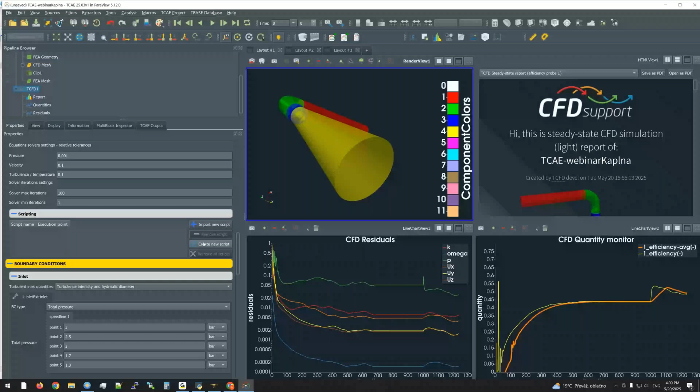So it's possible, it's not recommended. And for conceptual changes, we would rather recommend to go via scripting. You can write down a short script and say what quantity in which dictionary would be changed, exactly in the workflow, if it's not possible directly in the graphical interface to be saved in the configuration files. Yes, this is normal way. So this is how we would proceed with this.

And because time is running very quickly, we are already 2 hours long. Well, yes. Also, a question about the internal point. Yes, this is correct. So someone, it's more a remark.

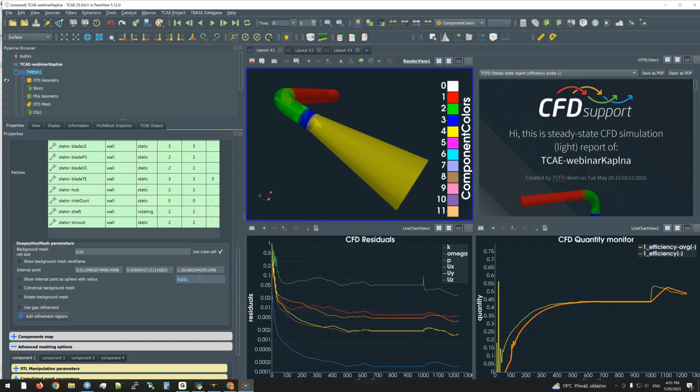The project configuration does not save the radius and the origin of the internal point. Yes, that's the ParaView default property, and it's not being saved with the project. So you have to change it every time you open the project. We are sorry for this.

And by the way, in the next version, we will have something which helps a lot. There will be an automated internal point function, which will cover 99.9% of cases. So there will be no need of specifying manually the internal point, which is a typical bottleneck and annoying little thing. So from the next version, there will hopefully be no internal point needed, with only a few exceptions, which is not important.

Okay Radek, I'm going to conclude, because we are already quite long. Yes, so I need to find it in this new user interface, which is sometimes difficult for me. My name is here, so I will make myself presenter and stop sharing my screen.

Okay, what, I think you need to share the screen. I need to share it again. Okay, I don't see anything sharing now. So I hope you can see it now. Yes, we can see. This is again the expert window.

Thank you, Radek, for everything. It's been detailed work. This has been the Q&A session, and this is it.